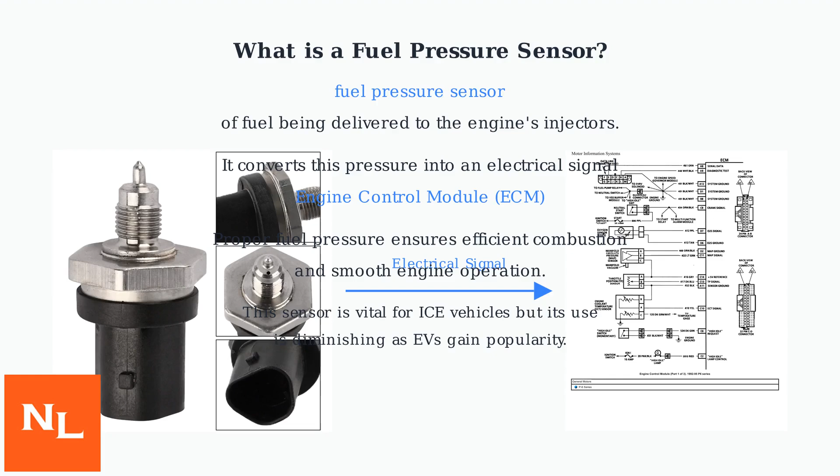A fuel pressure sensor typically uses a piezoelectric or strain gauge mechanism to measure fuel pressure. This mechanism converts pressure into an electrical signal that reports the pressure in pounds per square inch, or PSI, to the engine control module, or ECM.

Normal fuel pressure ranges from 30 to 60 psi at idle and 45 to 80 psi under load, depending on the vehicle. When the sensor is bad and provides inaccurate readings, the ECM misadjusts fuel delivery, leading to performance issues.

Poor engine performance is the first major symptom of a bad fuel pressure sensor. This includes engine hesitation during acceleration, reduced overall acceleration power, frequent misfires, and decreased fuel efficiency.

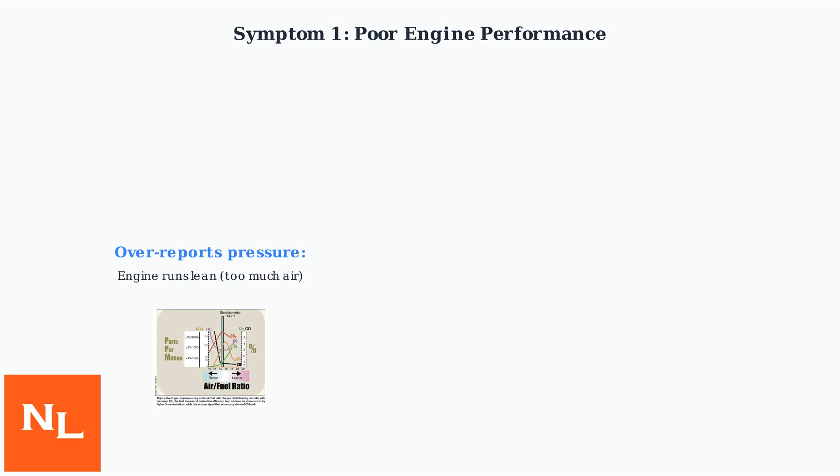If the sensor over-reports fuel pressure, the engine control module thinks there's more fuel than there actually is, causing the engine to run lean with too much air relative to fuel. Conversely, if the sensor underreports pressure, the module assumes there's less fuel, leading to a rich condition with too much fuel and not enough air.

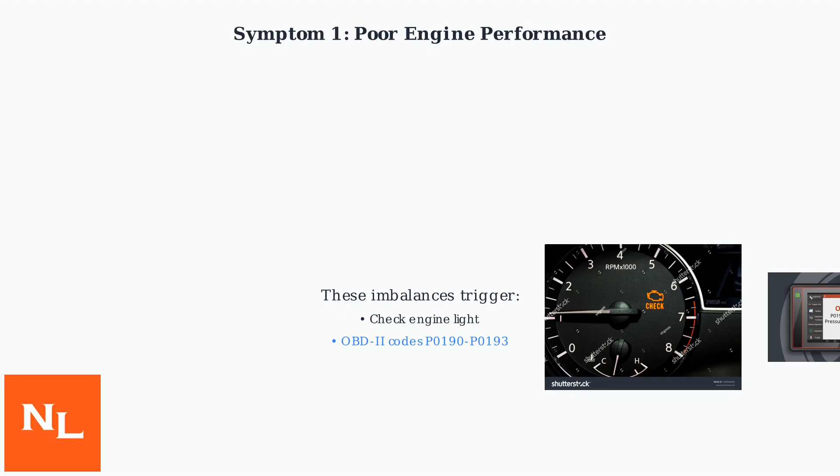These fuel-air imbalances can trigger the check engine light on the dashboard and generate specific OBD2 diagnostic codes, such as P0190 through P0193, indicating fuel pressure sensor circuit issues.

Difficulty starting, especially in cold weather or after idling, is a key symptom. This stems from low pressure signals preventing proper priming of the engine. A failing sensor might cause the ECM to shut off fuel pumps prematurely, preventing the engine from starting easily.

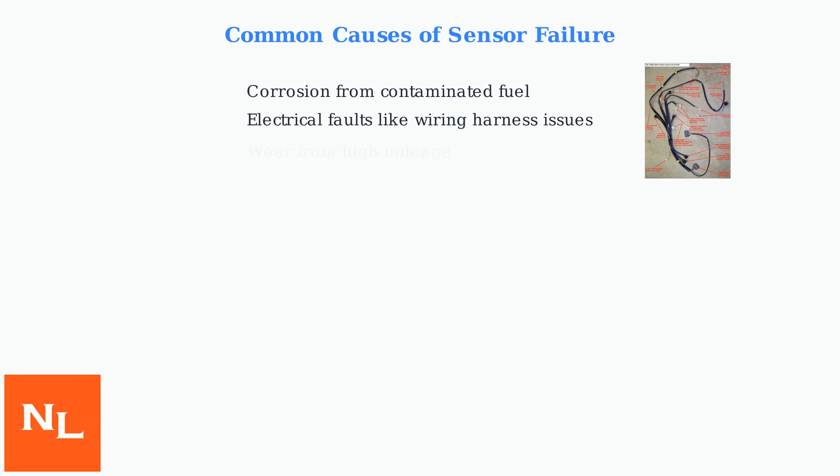Common causes of fuel pressure sensor failure include corrosion from contaminated fuel, electrical faults such as wiring harness issues, and wear from high mileage. To diagnose a bad sensor, use tools like a multimeter or scan tool to test the sensor output. Normal voltage output ranges from 0.5 to 4.5 volts. Always check the voltage outputs first.

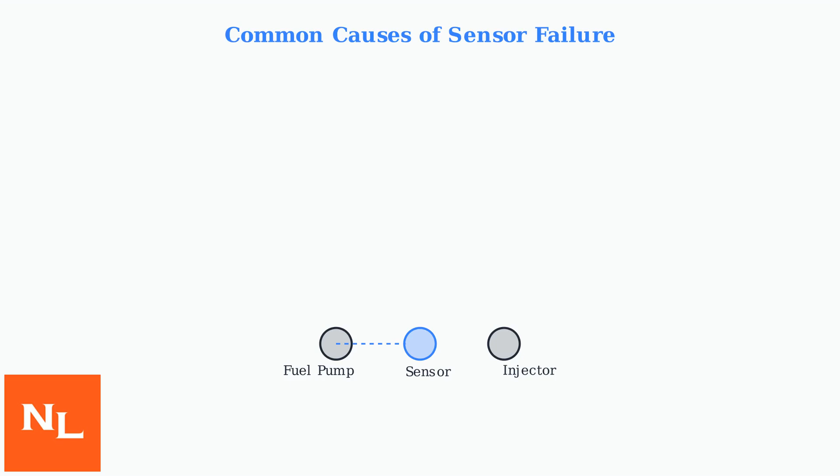The sensor is a key component in the fuel system, positioned between the fuel pump and injector. A real-world example comes from the

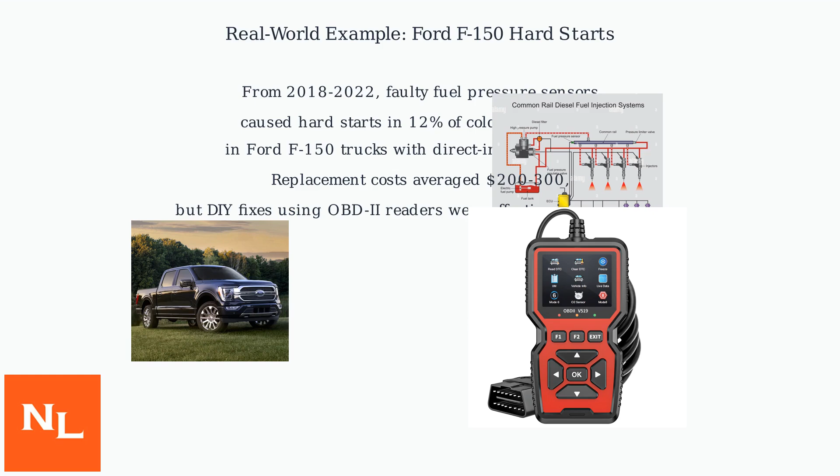2018-2022 Ford F-150 trucks. Faulty fuel pressure sensors were responsible for hard starts in 12% of cold start failures. Owners experienced repeated cranking due to sensor drift in the direct injection systems. While replacement costs averaged $200 to $300, many successfully performed DIY fixes using OBD2 readers.

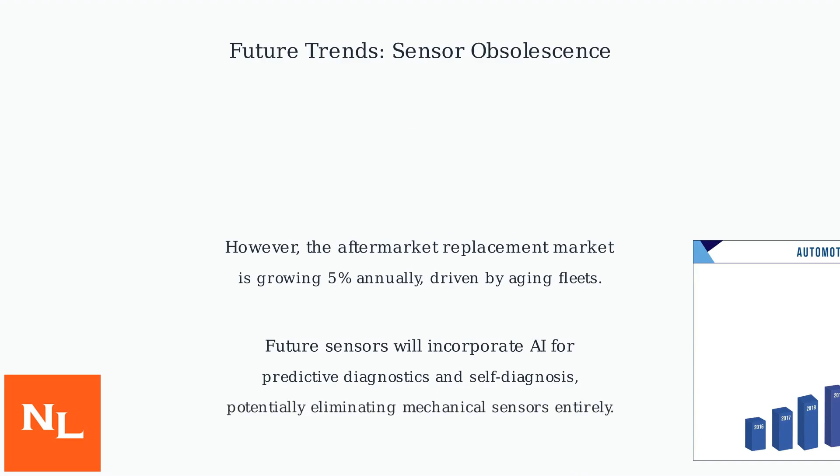The automotive industry is undergoing a major transformation. Electric vehicle adoption is rising rapidly, projected to reach 40% of global sales by 2030, leading to fuel pressure sensor obsolescence in internal combustion engine vehicles.

However, the aftermarket sensor replacement market continues to grow at 5% annually, driven by aging vehicle fleets that still require maintenance. Future sensors will incorporate artificial intelligence for predictive diagnostics and self-diagnosis, potentially eliminating mechanical sensors entirely in favor of virtual simulations.